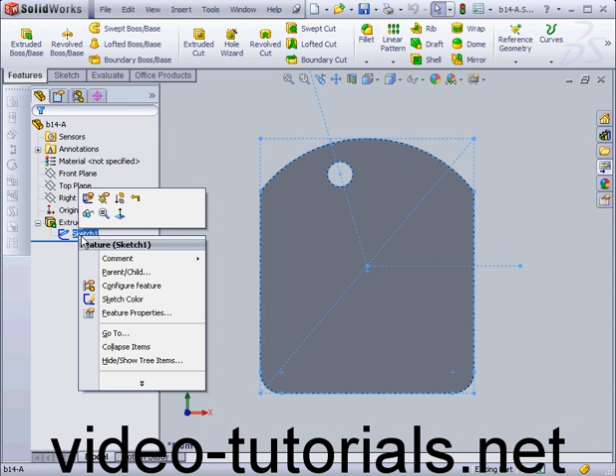Welcome to our tutorial about adding sketches to a drawing. First of all, let's see how this particular part was constructed. As you see, we've got construction geometry that helps to define the geometry of our part. Now let's exit the sketch.

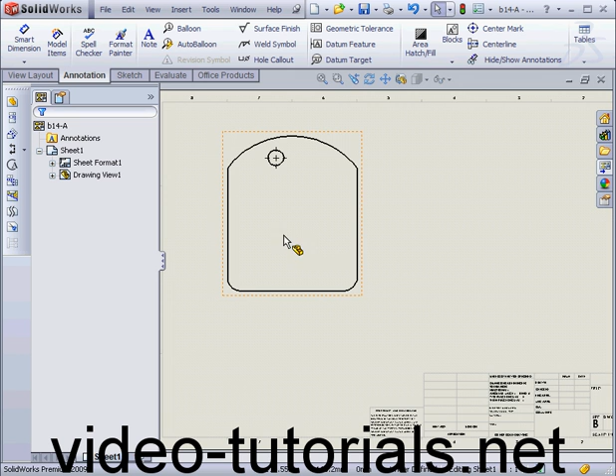And let's go to New Drawing, make Drawing from Part Assembly. Landscape B. In this tutorial, I'll just be using the front view. Let's click OK. Now let's go to the Sketch tab. First, I'll create a rectangle. In the Options control area, check for construction.

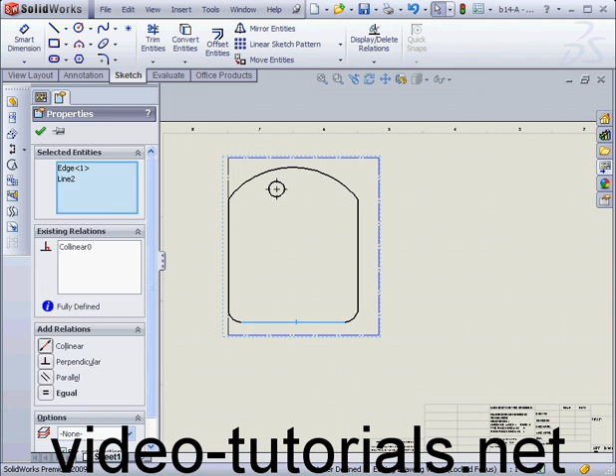Let's select this line and this line. Add a collinear relation. This line and this line, another collinear relation. This line, and shift select this one. Add another collinear relation. Now this curve and this line, create a tangent relation. OK.

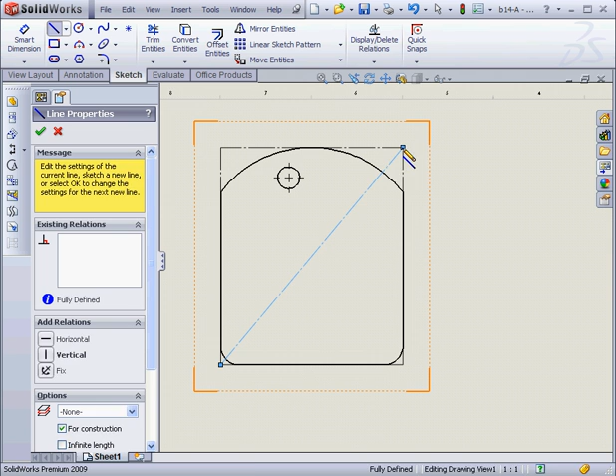Next, I'm going to use the center line tool. I want to create a line between these two corners. Right-click, select. I'm going to drop 2 points somewhere here. Let's use another center line now. I'm going to touch this line and create a line from the center of this line. Right-click, select. Next, let's go to the Annotation tab.

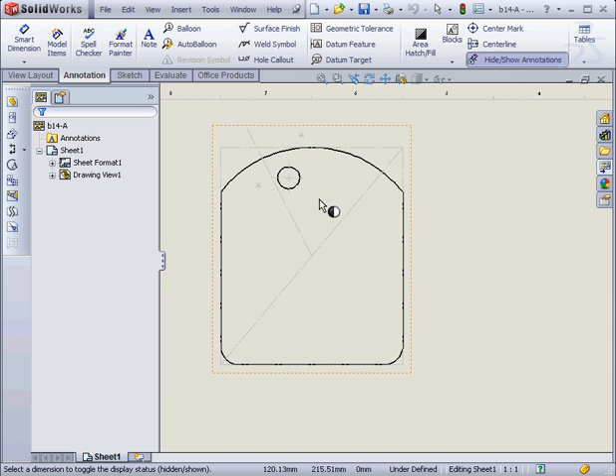Hide Show Annotations. I'm going to select this center mark. I'm going to hide it. Now I'll select this point and this curve. I'll add a concentric relation. Select this line and this point and add a coincident relation.

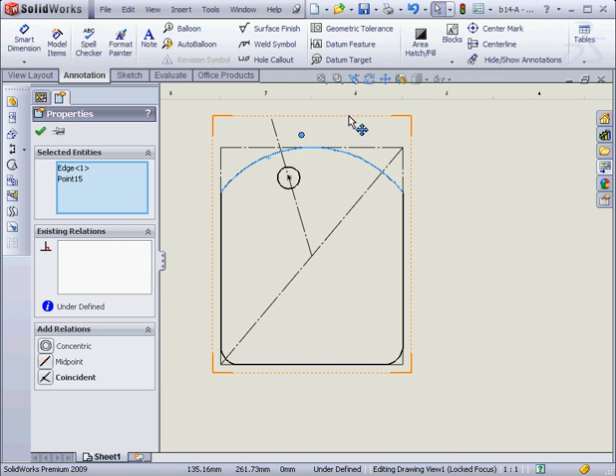Lastly, I'm going to select this point and this curve, as well as this line. I'll create an intersection relation. Let's click OK. Let's add one more construction line here, center line. This one will be horizontal. Right-click, select.

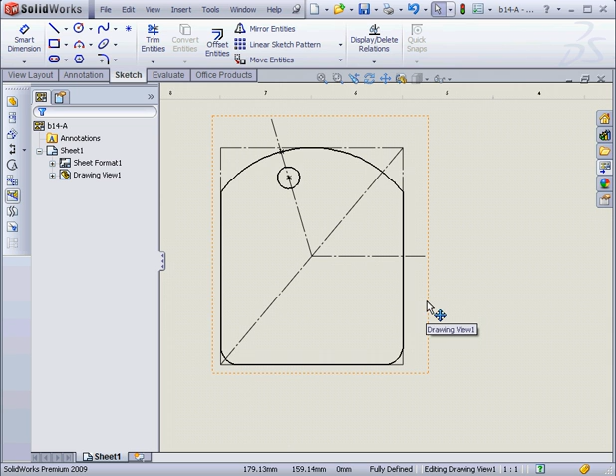When you're adding sketches and dimensions to your drawing, you may find yourself in a situation where SolidWorks gives you a message: the sketch is overdefined, or asks you to make the dimensions driven, something like this, for example. Now, if I put an angular dimension right here, SolidWorks tells me that this dimension will make the sketch overdefined or unable to solve. Do I want to add it as a driven dimension instead? Well, yes. I'm going to delete this dimension and dimension our model.

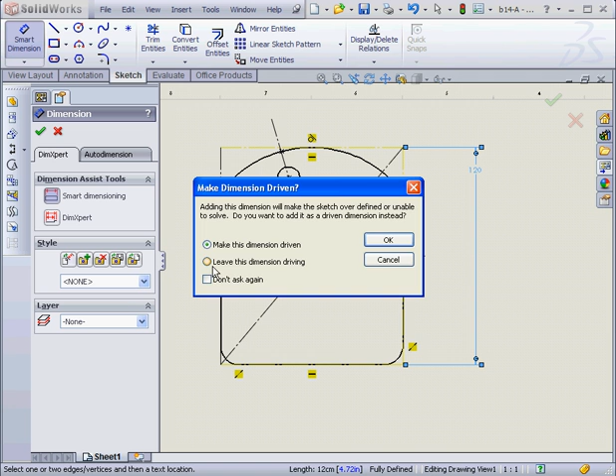Let's show what happens if we opt to leave this dimension driving. What I end up with is an overdefined sketch. When I move the mouse in empty space, the sketch warnings appear. Let's select the sketch. And let's double-click on the warning. Select Diagnose.

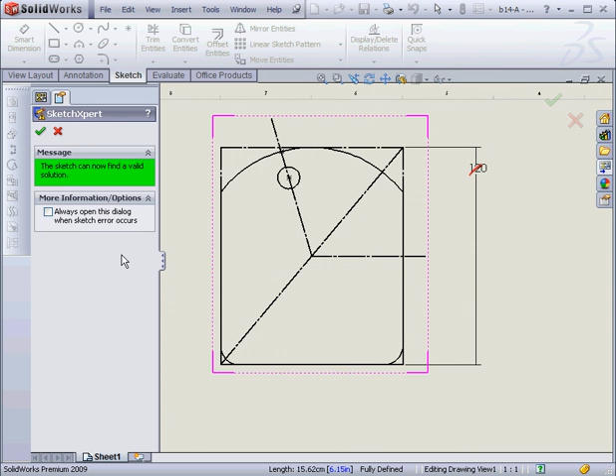The Diagnose window gives us 5 solutions. It suggests that we remove this tangency. Next, to remove the horizontal relations. To remove a dimension and a collinear relation. OK. Let's go back and remove this dimension. Accept. And the sketch is now OK. Let's apply the rest of the dimensions.

We'll put an angular dimension here. We'll make it dimension driven. Next, the distance between these 2 points. When I move my mouse, the dimension keeps changing. When I find the point where I get the dimension I need, I right-click, and that locks the dimension. If I want to unlock the dimension, I can just right-click again and then adjust it as needed. You relock the dimensions with another right-click. Let's make it dimension-driven. OK.

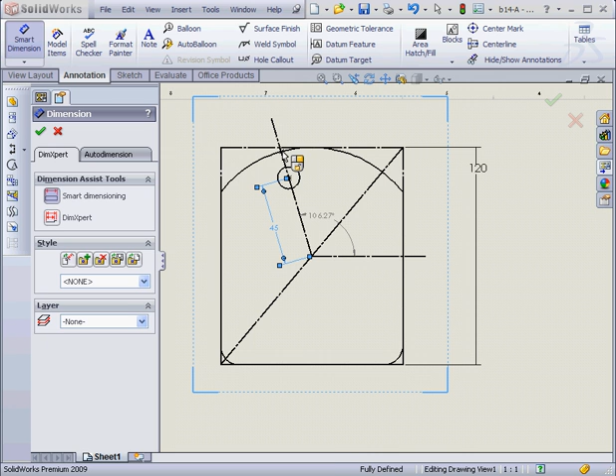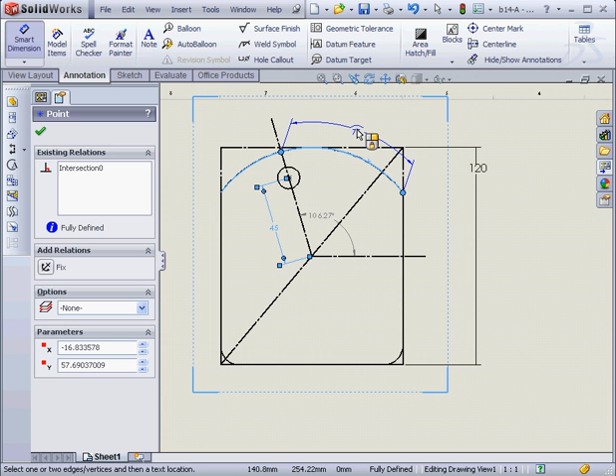Next, the distance between these 2 points. When I move my mouse, as you see, the dimension keeps changing. What I want to happen here, I'd like this dimension to measure along this curve. I'll mouse over and then click on the curve. See how the dimension changes? I'll place it right here. Click OK.

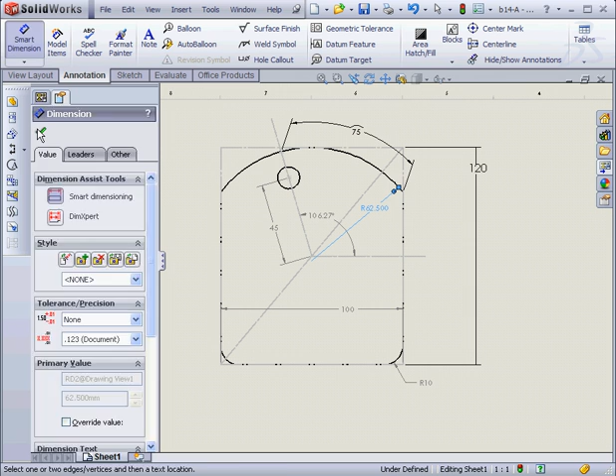And let's place a radial dimension right here. And then we'll specify the overall width. Make it dimension driven, OK. Lastly, I'll put a radial dimension right here. And this concludes our tutorial about adding a sketch to a drawing.